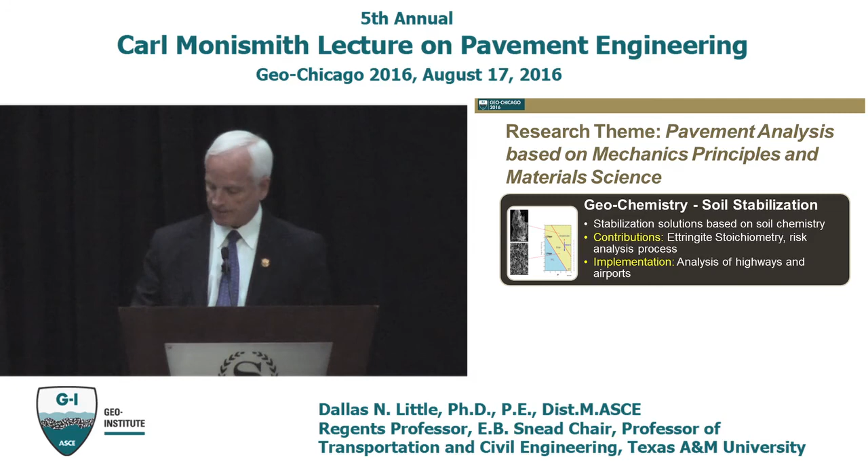We have problems in chemical soil stabilization. Sometimes the problems are simple, sometimes they're great. And when we try to solve those problems, we really have to go back to a basic understanding of the geochemistry and the material science behind it. That's where I get a lot of kicks, that's where I have fun.

Now let's go back to the basic analysis of a flexible pavement system. The tool we're using is called Panda, which is a computational model of the pavement structure. In the constitutive relationships within Panda, it's important that we characterize the asphalt as nonlinear, viscoelastic, and viscoplastic.

Besides doing that, we have a number of state variables that help define the response of the asphalt, and I've listed those state variables here. The first one, the Q term, is simply a definition of how the failure surface changes.

It's a dynamic failure surface. So when we calculate damage, we're calculating damage against a moving failure surface that hardens with load applications, and if there's an extended rest period between or among load applications, there's a bit of relaxation. So this state variable that defines the movement of the failure surface has a hardening function that moves it forward, makes it stronger, and it has a bit of a relaxation function in it as well that we have determined is required over a long time of research.

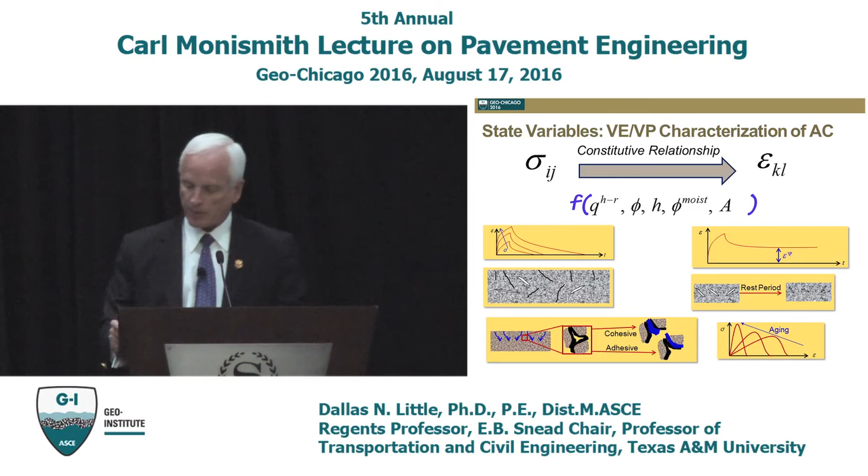So our model, Panda, is a nonlinear model, and it characterizes the asphalt as nonlinear, viscoelastic, viscoplastic. The model that we use for the nonlinear viscoelastic portion is a model that was developed in the late 60s by Dick Schapery at Texas A&M. And the G terms in this particular model define the level of stress sensitivity that makes it nonlinear.

The first G sub naught modifies the initial compliance, the elastic response. The terms before and after the integral, G1 and G2, modify the transient compliance response. And of course, we have a time-temperature shift factor involved in this calculation of the viscoelastic properties.

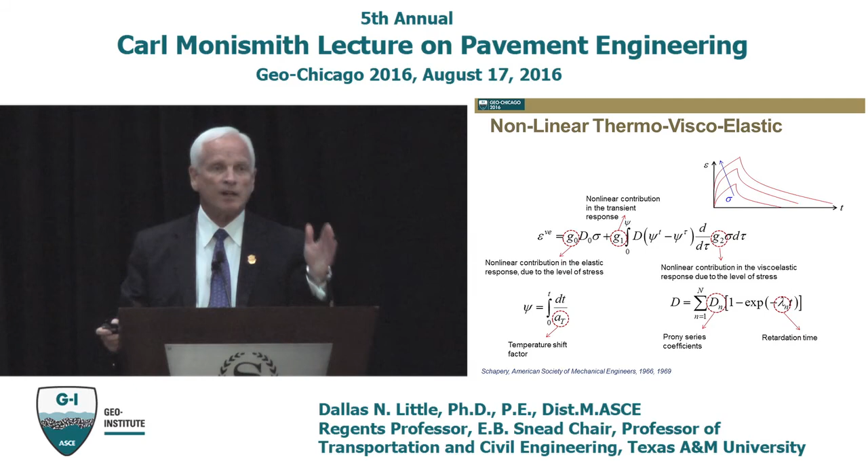And we find it more convenient to model the transient compliance using a Prony series, where d sub n represents the coefficient and lambda sub n represents the retardation times in the Prony series that defines the viscoelastic response, which is modeled by a series of Kelvin systems in the model. So we accommodate viscoelasticity, and to make a long story short, we accommodate nonlinear viscoelasticity as well.

So how does Panda deal with rutting? How does it deal with plastic deformation? Well, I'm taking some pretty complex processes and trying to simplify them, trying to boil them down to some simple discussion here, and sometimes it's very difficult to get too simple in some of these models. But what Panda does is account for the viscoelastic component of strain, as we just discussed, and it also accounts for a non-recoverable, viscoplastic component of strain, and that's what causes rutting to occur.

So the viscoplastic component of strain is accounted for by a Perzyna-type model. In 1971, Perzyna and his colleagues came up with a model that defines the rate of viscoplastic strain, and that function looks like this. It looks pretty complex, pretty hairy, but basically it starts off with an initial identifier of the rate of initial plastic deformation - that's the gamma superscript VP term.

Then, within the brackets here, which are called Macaulay brackets, there is a phi function times F, which is called an overstress function. Essentially what this term does is identify the stress point. If the stress point is behind the yield surface - you can see the dark curve here, that's the yield surface - and if it's within the yield surface, no plastic deformation occurs; it simply does not develop rutting. But if it occurs outside that yield surface, then plastic deformation occurs.

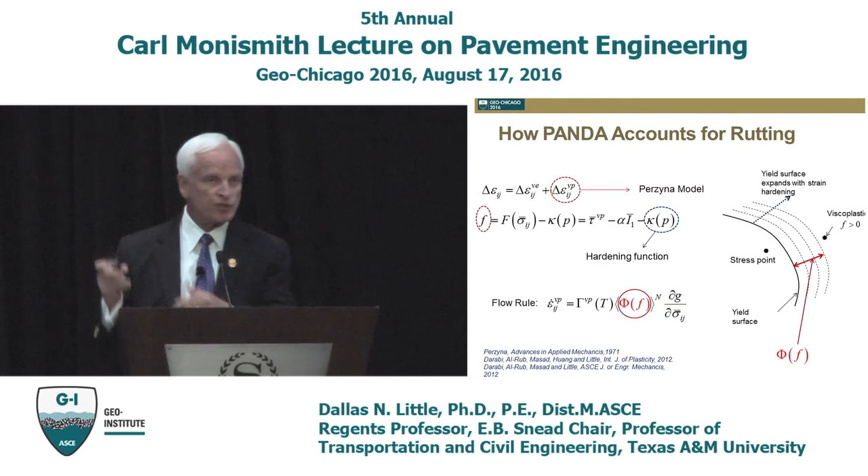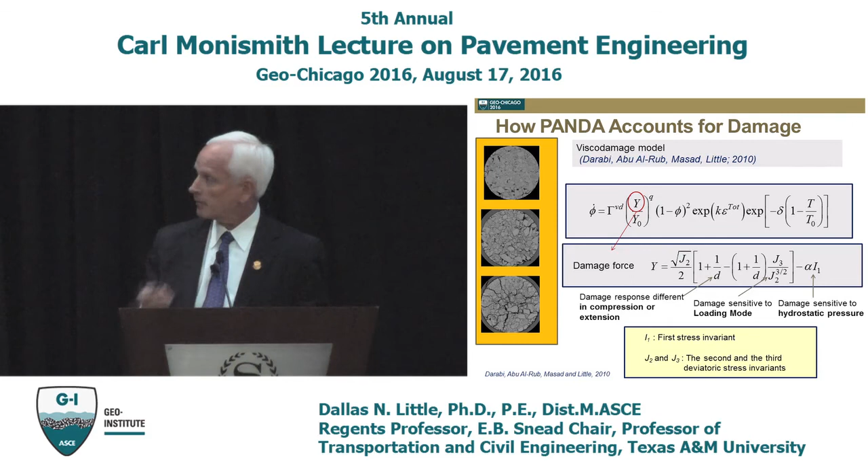Now we've got a way to calculate damage. This damage we're looking at, we're really viewing as a series of microcracks that are compromising the integrity of the area resisting load, using continuum damage mechanics. The Y function, driven by shear stresses and mediated by confining pressures, drives this damage force.

There's something working against this damage force, and that is healing. Several years ago, one of my students, Professor Amit Bhasin, now Associate Professor at the University of Texas at Austin, looked into the work of healing in polymers, and he came up with some work by Professors Wool and O'Connor back in 1981.

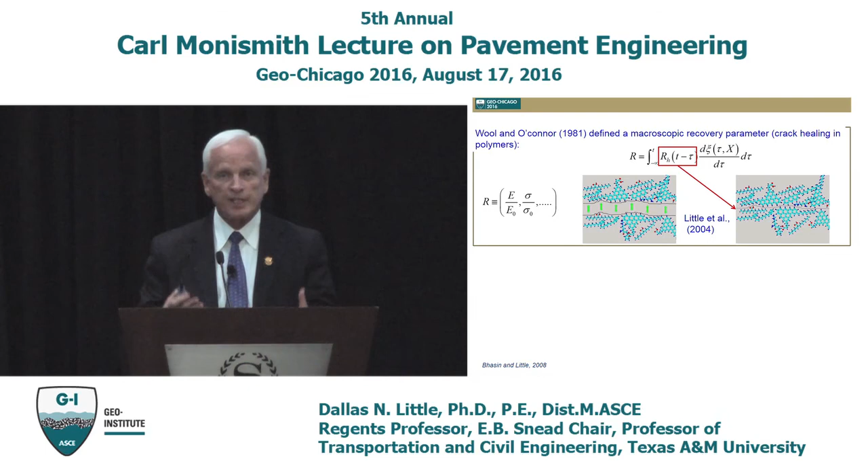So what's going on as the crack closes is that these molecules are reorganizing themselves, redistributing to minimize the free energy, to lower that high free energy. That free energy is high on two open crack faces because you've got so many incomplete bonds. So when they come back together, free energy wants to minimize, and that causes mobilization across the crack face.

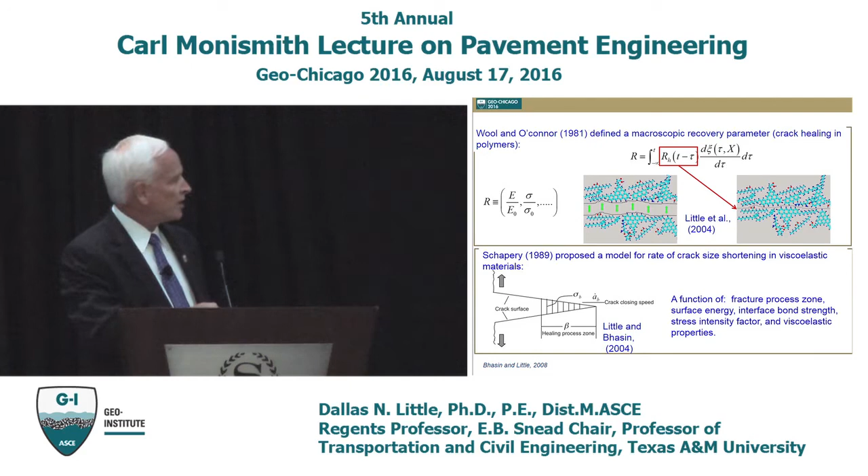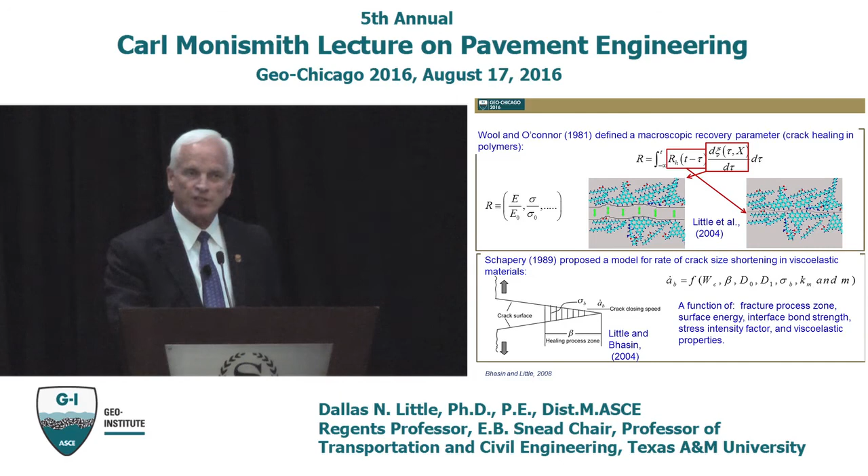So we said, well, that's a great model for healing. And around the same time, actually a little after that, Dick Schapery said that crack healing in a viscoelastic material is a function of the size of the process zone, how big the crack is, the stress that pulls the crack back together, the viscoelastic compliance properties of the crack itself, how mobile that crack is to closing, and surface free energy. So both claim that surface free energy has something to do with that wetting process and that healing process.

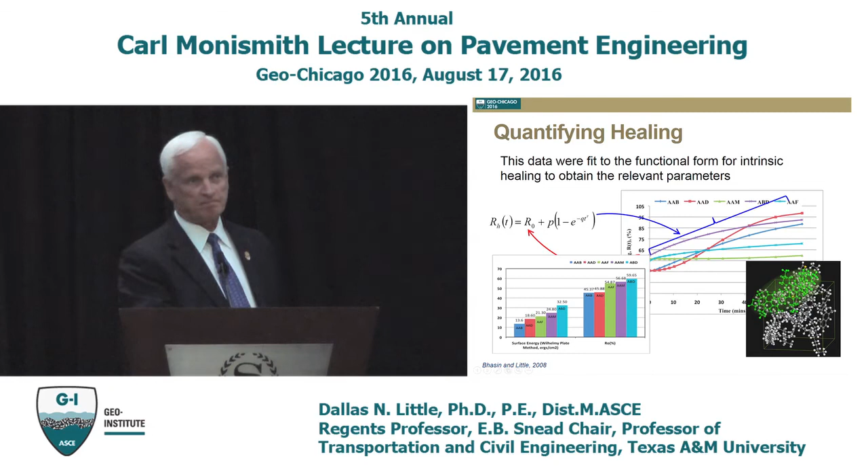And what we found was not surprising: the more mobile the molecular structures, the greater the healing, and the faster the healing. So that gave us a lot of confidence.

Let's go now to some work that was done by another PhD student of mine who's now assistant professor at the University of Kansas, and his name is Masoud Darabi. Masoud has been of great help in helping us develop Panda. His brains are behind much of the complex mechanics.

So what Masoud did in his PhD work was he looked at a controlled strain fatigue test. And of course he said, well, we're going to have a little compression in this controlled strain fatigue test because we're going to push the sample back together. This is a uniaxial sample. So we're going to pull a strain on it, we're going to push it back together, and during this tensile mode from A to B, of course we have a tensile stress.

And when we go from A to B, the crack is becoming longer. Fatigue damage is occurring because of increasing microcrack length.

When this occurs, when we put the compressive mode into play from B to C, we develop a compressive stress in that controlled strain sample as we push it back together. And one would think that during that compressive mode, maybe some of that crack that's pushed back together would re-wet, reorganize, and you'd develop at least a partial recovery in strength.

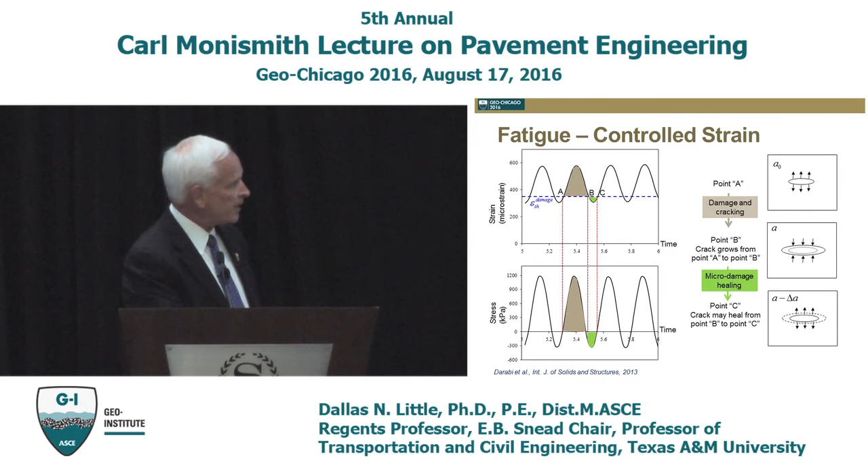So Masoud did some very careful work in a number of fatigue experiments, and what he found was that if we used our viscoelastic, viscoplastic damage model that we just discussed, towards the middle point and the end of the experiments, the experimental data would look like the blue hysteresis loop, and the model would look like the red hysteresis loop, which is much flatter.

You can see the angle if you draw a line from that point to that point, and a line from that point to that point.

The slope goes down, indicating that there's a reduction in stiffness and that there's more damage occurring in the model than would be actually seen in the experiment.

When we put in a healing evolution function that follows the trend we just discussed, it allows us to pretty much track the experimental data, the green curve and the blue curve.

So what I've done is looked at the blue curve, which is the experimental data. The green curve is the viscoelastic, viscoplastic damage model with the healing evolution function placed into it, and it tracks the blue curve much better than the red curve, which is the viscoelastic, viscoplastic damage model without healing.

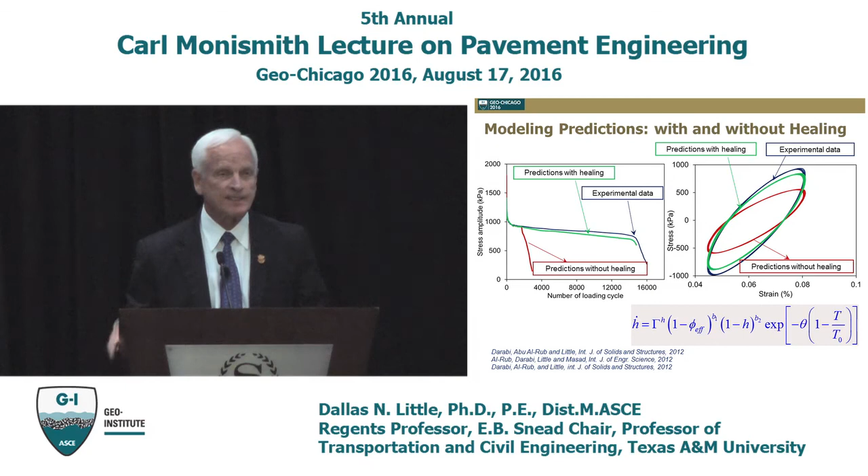Now we've talked about some of the evolution functions for those state variables and how we view them in Panda. We've already said that Panda is a viscoelastic, viscoplastic model of the asphalt, and we can couple in healing. We don't have to use it, but we can couple it into the analysis.

I'm going to skip now from the general pavement mixture homogeneous layer level to the micro level, where we're actually looking at the structure of the asphalt. We would get that structure from some type of imaging technique such as tomography, to understand what the shape of the aggregate particles looks like. The blue in between the aggregate particles would be the mastic, the fine aggregate matrix.

In this particular micromechanical analysis, we're going to look at a component of the mixture and blow it up. The aggregate is considered elastic. The blue material would be the fine aggregate, the asphalt, mineral filler and so forth. You've also got a light blue interface, which is the adhesive interface, so we can characterize the nature of that interface as well.

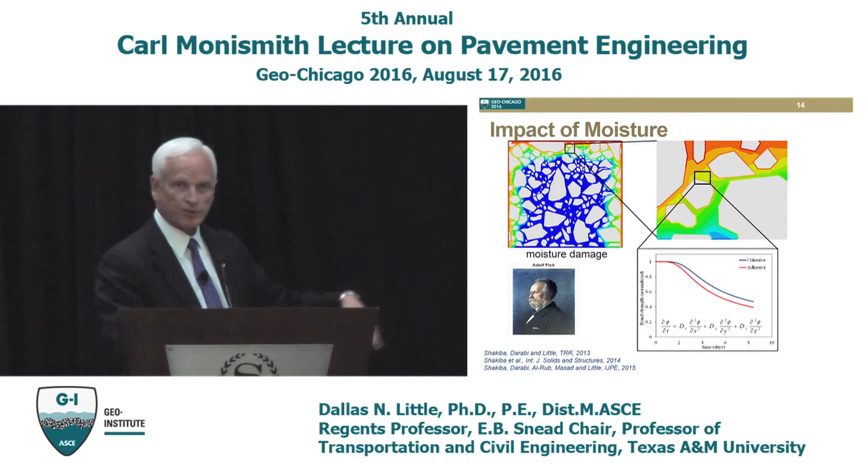In this particular simulation, moisture diffuses, and as it diffuses we're tracking the bond strength. The blue is the cohesive bond strength, the strength of the mastic being compromised because it's moisture laden. The red is the strength at the interface, the adhesive strength. You can see they diminish as moisture increases into the sample, as the moisture state becomes higher and higher.

Now let's go a step further. Let's say we're going to model something very simple. We've got an aggregate particle, the blue mastic, another aggregate particle, the red interface where adhesion occurs, and an air void here. That air void is now filled with water, it's saturated, and we're allowing diffusion to occur. If we apply a load to this material, let me back up.

If we apply a load to this material, then the mechanical process coupled with the moisture diffusion allows us to envision the rate of damage. You can see that when it's a saturated media, that rate of damage is going to be a whole lot faster because the hot colors represent a higher level of damage, the cooler, lighter colors, a lower level. When it's unsaturated, of course, the damage process is lower.

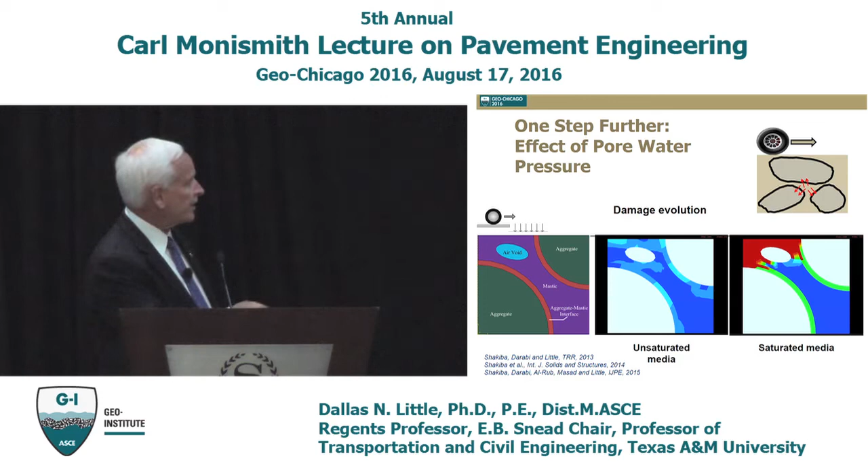Here's another view of a similar situation. What we're doing here is looking at the damage process. We're blowing up this little section in this micromechanical analysis, and the hotter colors represent the damage areas, so you can see that damage is occurring at that interface in most situations, which would cause stripping.

Why did I show this? Well, I thought this was a good way to show you how Panda has the capability of taking mechanical damage and coupling it with the effect of moisture. As moisture penetrates and diffuses into the system according to a recognized law like Fick's law, where we define the diffusivity, and we couple in the mechanical load, then we can visualize the damage process. We can do this at the mixture scale, the micro scale, or at the global scale or the pavement scale.

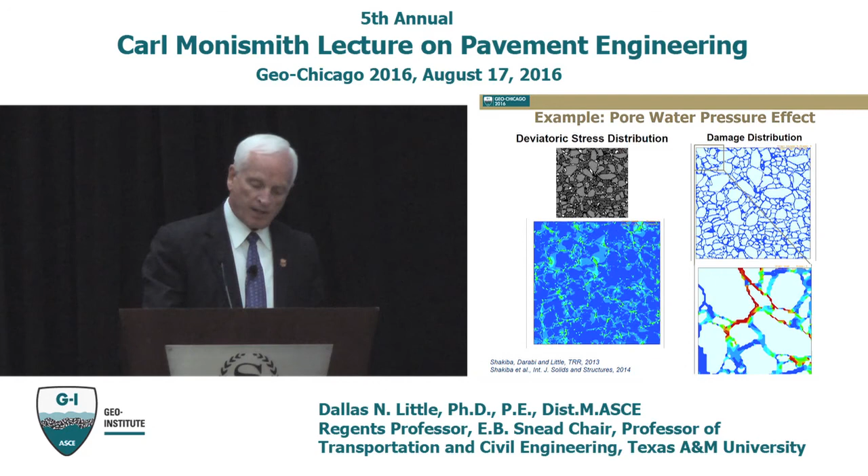What's the end result of something like that? Well, I'm getting ahead of myself. Hold on a second, I'll tell you. Let me go back one more step.

We talked about some of the basic fundamentals behind adhesion. So we did a lot of work on looking at adhesion and how aggregates and asphalt bond together. A little animation here: let's suppose the red is an asphalt, A, and the gray is a stone, S. The work of adhesion between the stone and the asphalt, as I pull them apart, defines the bond strength. So if we know the surface energy, which we can measure, of the stone, and the surface energy, which we can measure, of the asphalt, we can calculate the adhesive bond strength.

Here I've given you a little simulation. If you have a silica aggregate, then normally the high surface energy is because of these unbonded hydroxides, and the asphalt is going to want to bond with that because of its polar components bonding with the surface of the silica. That's what causes surface energy of both, the free bonds, and so that can be used to calculate the work of adhesion between the stone and the asphalt.

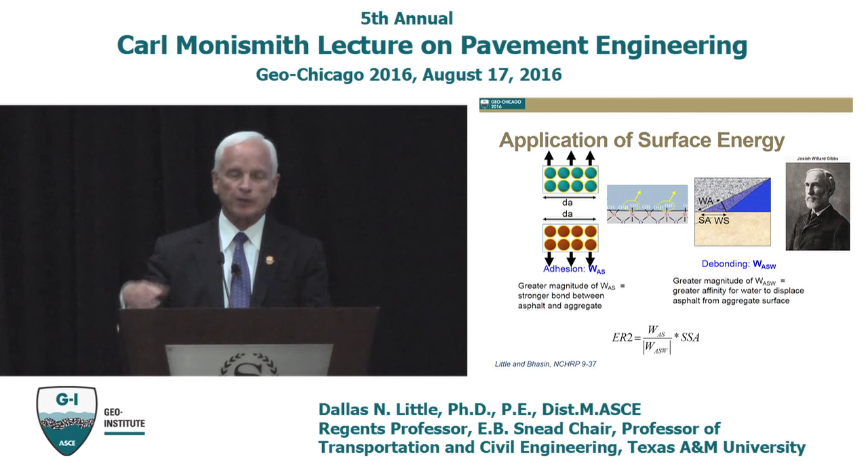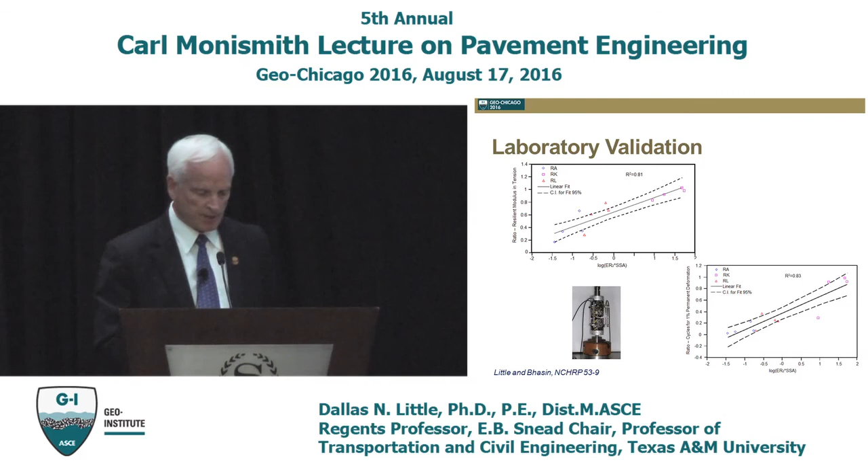Down here is the same kind of data, except we're looking at permanent deformation—1% permanent deformation—versus number of cycles to reach it. A high energy ratio gives a better response, a low energy ratio gives a poor response. So this is pretty good, solid validation data.

Let's now look at some practical application of all that. In these rectangular plots, I have the asphalt layer, and these are contours of damage. On top, you've got mechanical loading only after 20,000 cycles. Notice where the localization of damage is—it localizes down here in red, at the bottom of the asphalt layer, near the edge of the tire load. That's not a big surprise; intuitively we'd expect that from layered elastic analysis.

But now let's couple in the effect of moisture softening from diffusion of moisture. Now we have two localizations of damage, one near the bottom, one near the top. So this might be a bottom-up crack, and that could be a top-down crack. This coupling of environmental effects of moisture damage with mechanical effects can be very valid—it's something we really need to begin to focus on.

I'll interject here a question someone will always ask in a presentation like this: so what? That's so computationally intensive I'd never be able to do it. But that doesn't mean we as researchers shouldn't strive to go the extra mile to see what's in the future and keep moving towards a better system. Computational techniques are moving at a very rapid rate, and soon we'll have the power to do this, even in 3D mode—I'm confident.

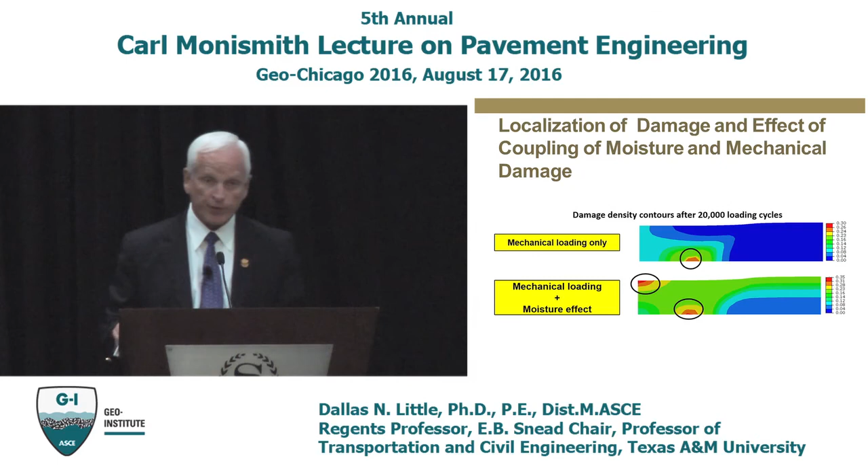Now this is another localization model. In this case we've got four asphalt segments with a load under the arrows: unaged on the upper left, 6 months on the upper right, 60 months lower left, and 120 months lower right. We look at the evolution of damage.

This is 8,000 load cycles, and you can see another change in the localization of damage. If it's unaged, there's not as much damage, but it still localizes near the bottom. With the effect of aging, as you'd expect, it becomes more brittle, but the critical area is near the surface, and it expands as the aging process occurs.

I'd love to talk to you about the evolution function of the aging state variable, but time doesn't permit that. As a matter of fact, I'm probably already getting close, and I'm not close to finishing, so I need to hurry up.

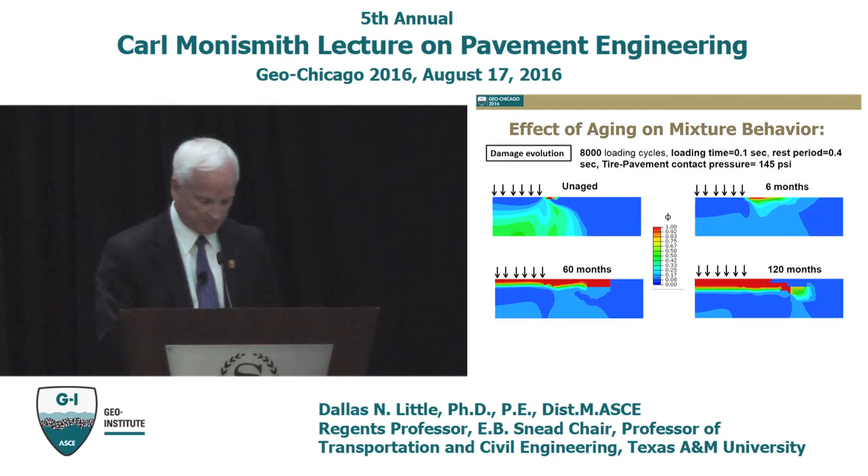In the last year, we've been very fortunate to work with Dr. Navneet Garg at the FAA, at their test facility in Atlantic City, New Jersey, looking at the damage done by the next generation of aircraft. These aircraft have high tire pressures and heavy wheel loads, and they're tracking through that magnificent facility doing accelerated testing. We're using Panda to evaluate the damage that occurs under those pavements.

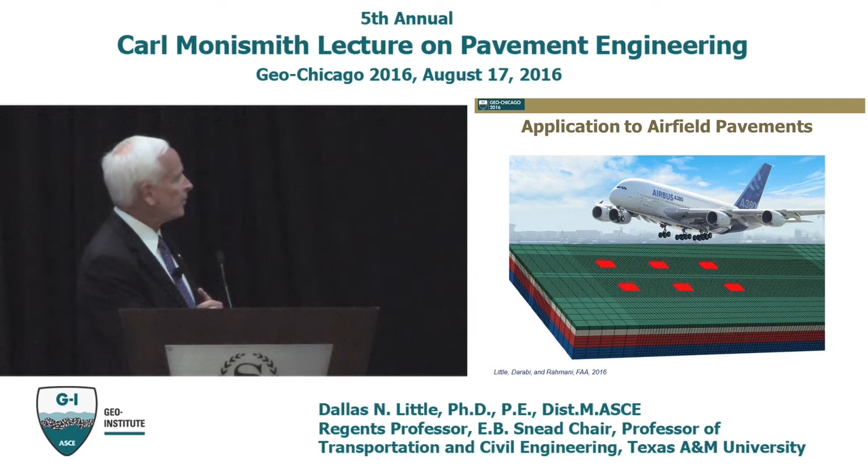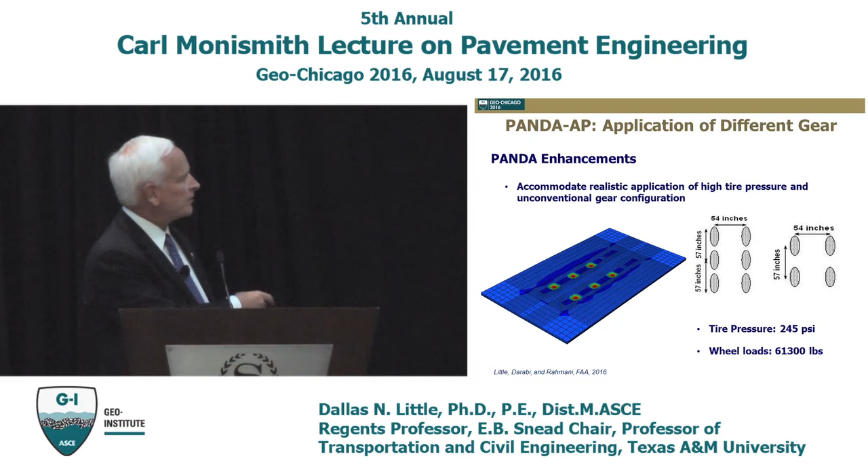I want to talk about one point here. We're looking at multiple wheel loads, so most of it has to be 3D simulation dealing with high tire pressures. One thing that struck me in the initial data: these are vertical stress contours under the load of something like a 777. The asphalt layer is fairly thin in these sections, I think about 5 inches, and then you've got the base and subbase.

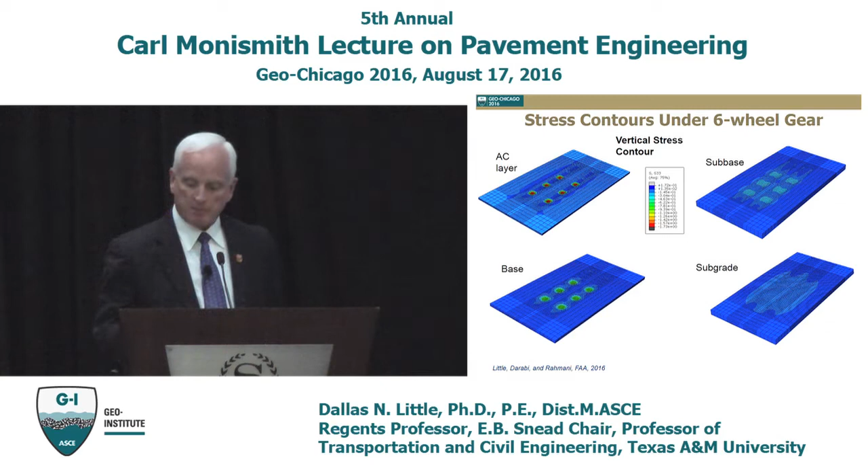You can see the vertical stress contours are high in the asphalt layer and very low in the subgrade, which is like a CBR3 subgrade. But if you look at the viscoplastic strain that occurs in the pavement layers according to Panda, even though those vertical stresses are high, the viscoplastic strain in the asphalt layer is negligible because it resists it, according to that plastic deformation model. Down here in the subbase is where you really have high viscoplastic strain—so that's where the rutting is occurring.

Prior to looking at the FAA sections, we were concentrating only on the asphalt layer. Certainly, with this kind of data, we have to turn our focus to the strain that's occurring, the plastic strain that's occurring in the sublayers.

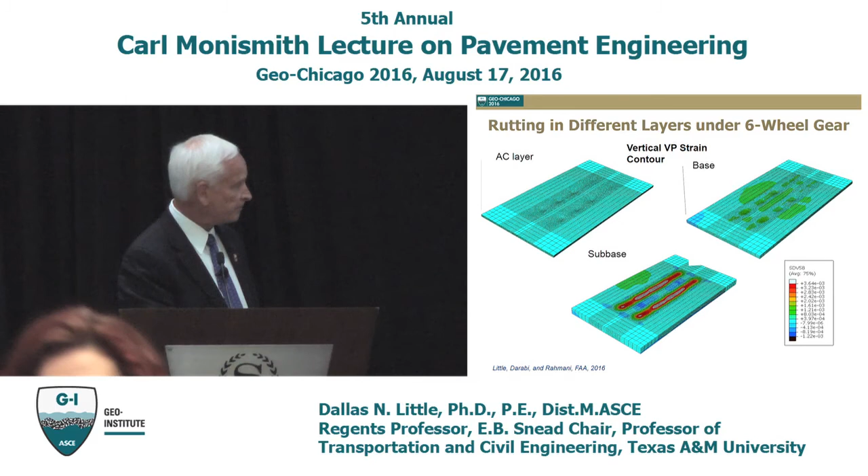Marshall Thompson and Erol Tutumluer would tell you that right off the bat, with all the work they've done on that at the University of Illinois and others. Bob Lytton too, but this is something we had to come up with as a good model for plastic deformation of these sublayers. So this is what we used.

We tried many different models to try to mimic what occurred at the FAA test facility, and what we came up with was a modified Drucker-Prager with a cap. That's nothing new; Drucker introduced that back in 1957. So we're not claiming we came up with this model, we're just applying it, probably a modified version, to see if we can understand the data we're getting from the FAA facility.

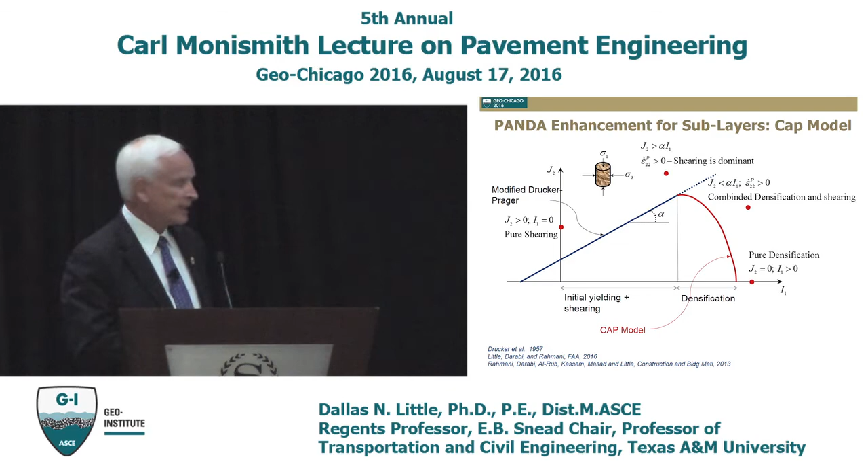And that tells us that even if we're below the shear surface, if we're outside of that red curve, densification can occur. Looking at the data at the test site in New Jersey, we found that much of the time it wasn't the shear stresses that caused that densification, but it was indeed the consolidation, the confinement that occurred in the subgrade that caused it.

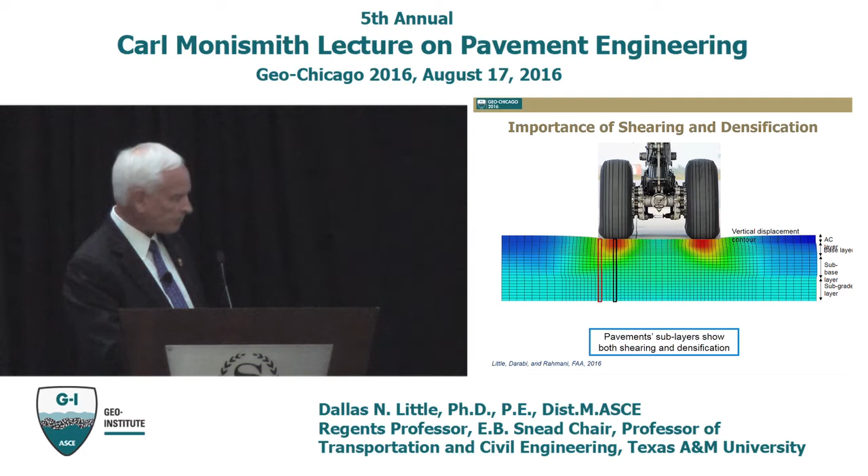densification-induced plastic strain. So this model evaluates plastic strain in the sublayers, the unbound layers, due to both densification as well as shear stresses. It takes both to mimic what's going on out there in the field.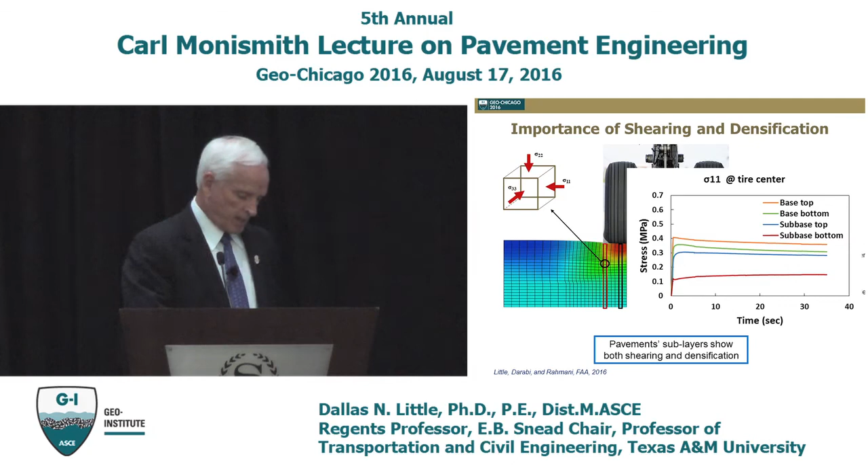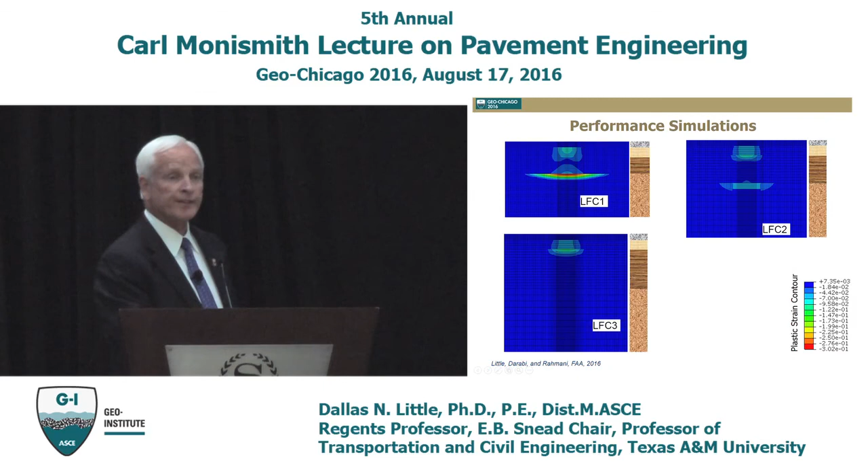We tried to use this approach to actually calculate the rut depths occurring in three sections, LFC 1, LFC 2, and LFC 3. The only difference among the three sections is that in all three the asphalt layer and base layer are the same thickness and material, so there's no difference there. The only difference is the thickness of the subbase, and all the subbase is the same material.

As you would expect, you're going to get more rutting in LFC 1 than in 2 or 3 because of the higher stresses there, and that's exactly what we saw. But the kicker is not just that, but how much they differ and how well you can predict it. Got a little too much animation here, could do without all of it, but it shows pretty much the same thing.

What we see here is that we were able to predict the amount of rutting under a certain level of traffic, which was quite significant due to subgrade deformation, using the Drucker-Prager cap model. Quite different: this is about 2.3 something inches at the top, and 1.5, 1.25. So a good bit of difference as the thickness of the subbase increases.

And this is the way we were able to predict it. We did a really good job in LFC1, as you can see the line mimics the data pretty closely. In LFC2, the data are the open circles, and the blue line is the measured or model response.

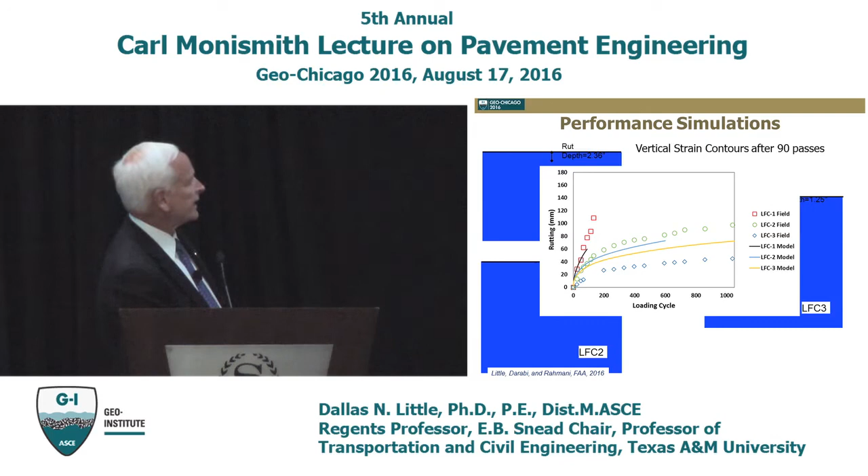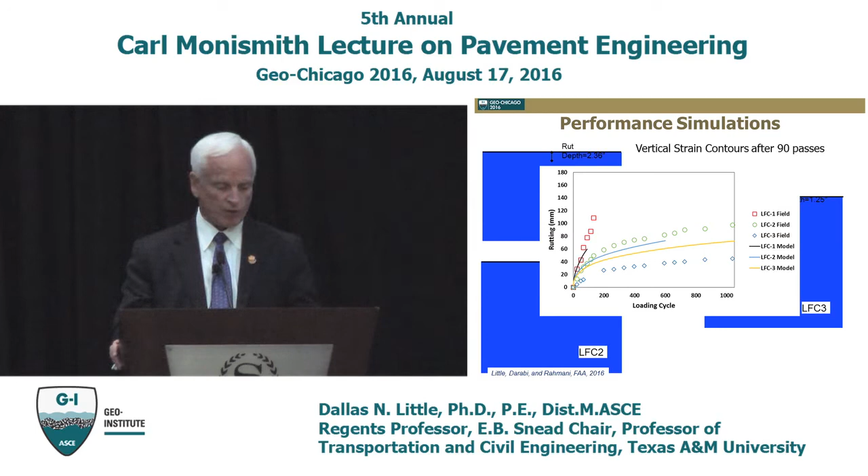In LFC3, we weren't quite as good, but we can improve that with 3-dimensional modeling. This was just a 2-dimensional axisymmetric model. I guess the key here is that we've got a fairly good model to evaluate plastic strain in the subgrade, and we certainly have to pay attention to that. We just can't focus on what's going on in the asphalt.

One other test section that we looked at was with John Rushing. Dr. Rushing is a research engineer at ERDC, the Engineer Research and Development Center, and a former student of mine at Texas A&M under the Army Corps of Engineers PhD program. They ran some experiments under F-15 high-pressure tires and C-17 high-weight, lower pressure tires.

What was interesting to me there was we were able to predict rutting. The asphalt layer was designed to rut. The sublayers, in that case, were considered to be elastic in our analysis. They were very stiff and were not designed to rut. If you look at the cross-section, that's pretty much exactly what happened.

Panda was able to predict the level of rutting within very reasonable levels, 5 millimeters where actual was 7 for the C-17, and 25 millimeters versus 29 for the F-15, the high tire pressure aircraft. But what was also impressive was if you look at the shape of the deflection basin, you can see the consolidation in the middle. You can also see the shearing and the pooching out on the side due to that lateral shear stress movement, which pretty much mimics what you saw in the cross sections in the field.

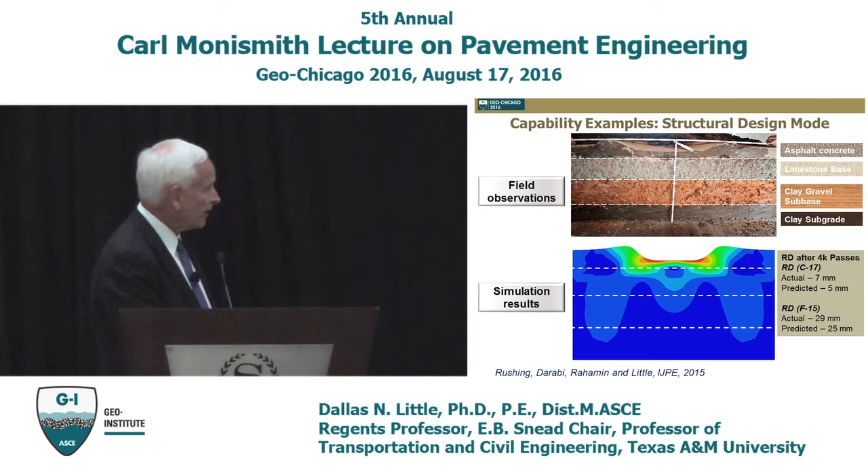So that was rather pleasing. I want to give tribute here to Professor Yong-Rak Kim, full Professor at the University of Nebraska. He's taken this type of work, and I'm just going to spend a minute on it. This is his work, but he did a lot of it through the Asphalt Research Consortium, and he's very kind to share that work with us and allow us to take some credit for at least helping him get it done. He's coupling, or communicating, between the micro-mechanical scale, the mixture scale, and what happens in the field. He calls the mixture scale the local scale, and he calls the pavement scale the global scale.

So what he does is he has an idea of what the representative volume element, if you want to call it that, of the mixture looks like, the aggregate distribution, the aggregate shape, and so forth, the properties of the aggregate, the properties of the mastic, and the properties of the interface. So he's able to look at that, and what he does is he relates the input between the global and the local. He calculates a homogenized global tensor from the local scale, so he sort of takes the local scale and homogenizes it by taking an average of the data.

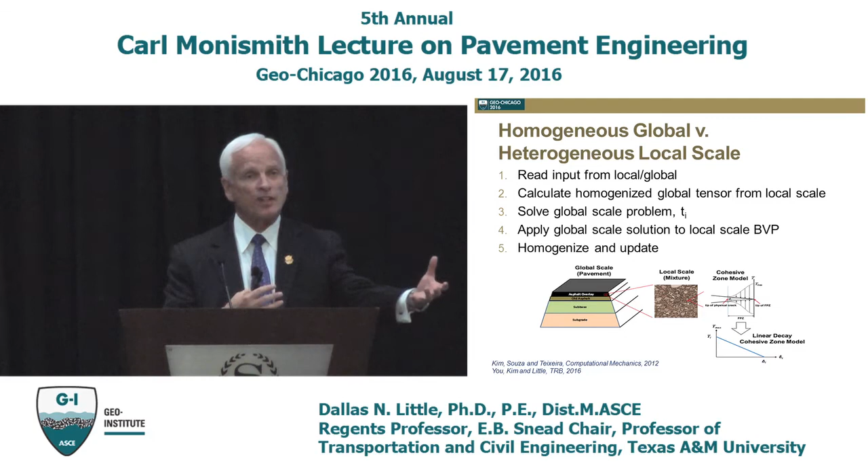Because you're going to transmit that information, that stiffness information, for example, to the global scale. At the global scale, you're going to have different stress states that are going to be communicated back to the mixture scale.

Here's an example of a paper that he wrote, and he was allowed to put my name on it because he felt sorry for me as an old professor. At any rate, he did an analysis of I-80 there in Nebraska, and won't go through too much detail, but he identified 3 or 4 representative volume elements that are in different locations under the wheel load. Being under different locations under the wheel load, they're subjected to different stress states. So we're going to communicate that back to the mixture scale, and the mixture scale is going to consider how much damage is done and homogenize that and communicate that back to the global scale.

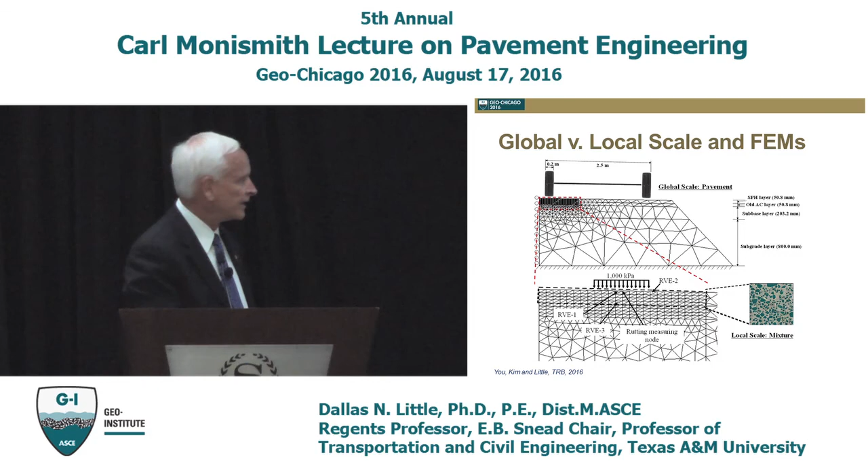So here's a little bit of an example, a little movie. I hope you can see it. We've got those elements that are located in different positions. One's right under the wheel, one's at the edge of the wheel, one's at the bottom of the AC layer, and one's way out here. And you can see the development of these damage areas that are developing into cracks, larger cracks.

So what happens is that he uses a cohesive zone element. The traction at the tip of the cohesive zone element identifies when a cohesive element is actually initiated, which can track the progression of cracks. Pretty ingenious method, and if you have any specific questions, I would encourage that you talk to him. So at this point in time, if I have time, if you have permission to have a little bit longer,

I'm going to talk a little bit about some geochemistry for about 15 minutes. If that's allowable, then I'll let Errol tell me. But at this point in time, I want to quickly review what we've talked about so far: a template called Panda that characterizes the asphalt as viscoelastic, viscoplastic, nonlinear. Those are very important parameters.

Panda is set in a template that is based on continuum damage mechanics. Continuum damage mechanics has some limitations, but its true value is that it allows us to couple other mechanisms with it. For example, moisture diffusion, weakening of the mastic, weakening of the asphalt aggregate interface because of moisture. It allows us to couple in the effects of aging, which harden the asphalt, making it more susceptible to damage.

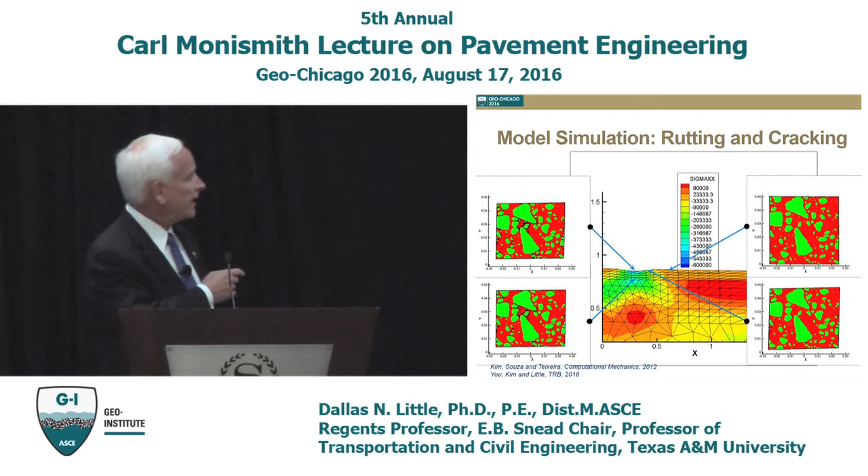Well, I had one other component there. In this paper that Professor Kim prepared, he used this approach, the coupling between the micromechanical mixture scale and the global scale, and he did a simple parametric study. He said, okay, let's say that the mastic, we're going to use case 1, which is the standard reference mastic.

Case 3 is going to be the standard reference mastic. Case 2, I'm going to reduce the mastic properties by 20%, lower them by 20%. Down here under tire loading, I'm going to have a standard tire load for cases 1 and 2. In case 3, I'm going to up it 30%.

And then he evaluated, using this approach, relative rutting and relative cohesive element damage. And you can see that looking at relative rutting, case 2 is about equal with case 3, and about 40% more rutting in those two cases than the standard. Over here under damage, which is due to crack development in the cohesive zones, or the cohesive elements, you can see that cases 1 and 2 are about the same, but when you get to case 3, it's 5 times the amount of damage.

What strikes me with this, if you compare that with equivalent axle load factors in the AASHTO 1993 design guide, this is a lot different. Because there you're looking at general serviceability change. Right? You're looking at serviceability change, because that's what the 93 design guide is based on, is delta PSI, change in serviceability, which is dominated by what?

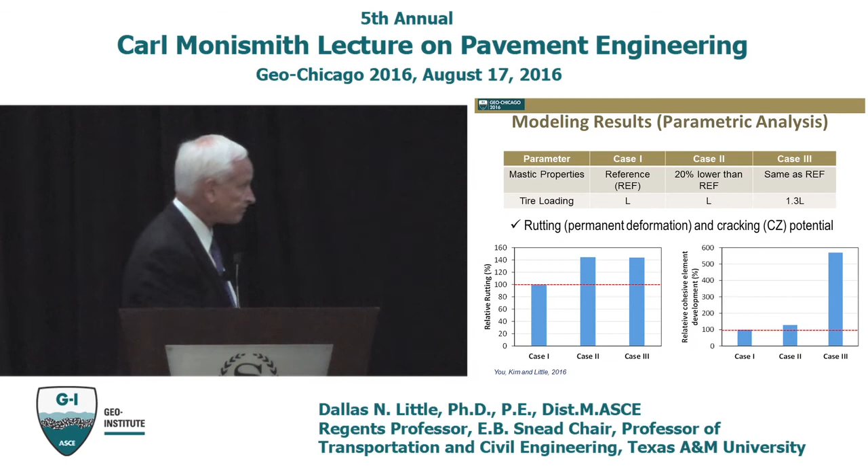Okay, so let's shift gears now and talk a little bit about something that I've always found very interesting. I love stabilization, chemical stabilization of soils. Done a lot of work with lime and cement over the years. And I know you've had a lecture in a previous section.

I wish I was able to hear it. I was not, but back in the mid-80s, after Jim Mitchell gave the Terzaghi lecture on interesting phenomena in soils, one of the things he talked about was the heaving soils at Stewart Avenue in Las Vegas. And that had to do with lime and sulfate-rich soils.

A year or so later, I was involved in Joe Poole Lake up in Arlington, Texas. So we can do all the great design and analysis of pavements we want to, but if we go in and stabilize a sulfate-bearing soil with a calcium-based stabilizer, we're going to get something like this. Damage that you'd never get from heavy loads or environmental effects due to moisture or aging. That's terrible. So we've got to do something about it. We have to address it.

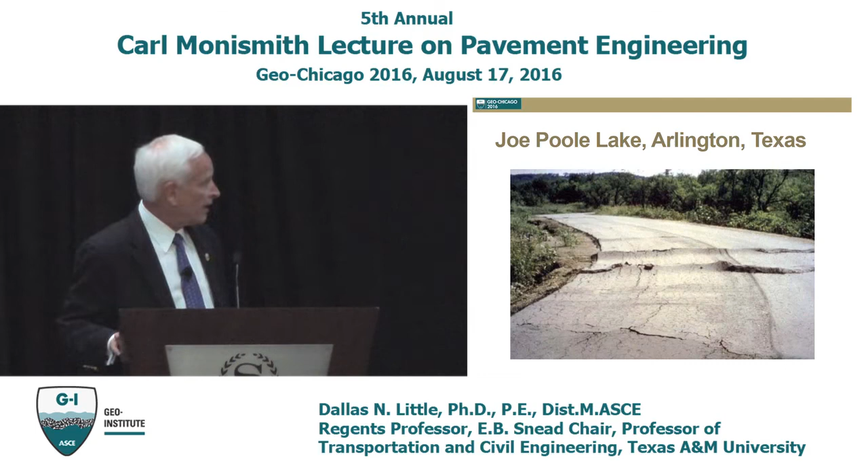Here is a cross-section, and you can see that what has happened is probably more than just vertical movement, you have the accumulation of a lot of lateral strain. That lateral strain has caused more of a thrust fault, where there's a passive earth pressure failure because of the movement over that pavement, the length of the lime stabilized layer.

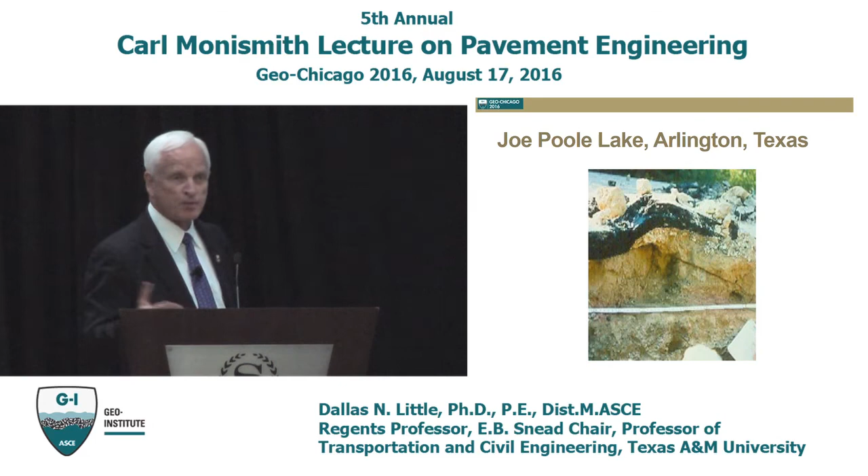So what is causing this problem? Well, I'm sure by now most of you know as geotechnical engineers that there's a material called ettringite, which is a calcium aluminate sulfate hydrate.

Here are the components, the reagents that go into ettringite on the left-hand side. If you look at the molar volumes of those components, to form 1 mole of ettringite it takes 1 mole of C3A. C is shorthand for calcium oxide, A is shorthand for aluminate. So C3A, 1 mole, it takes 3 moles of gypsum - C once again for lime, S bar for sulfate, and H for water - and it takes 26 moles of water, a whole lot of water.

If you look at a picture of ettringite, it looks something like this, a kind of tubular structure with all of those compounds in there. And if you look at it under a scanning electron microscope, it looks like this, sort of a stalky material that's very anisotropic - Errol and I worked for years to get people to say anisotropic, but now they're saying it. So it works and it kind of expands dimensionally differently.

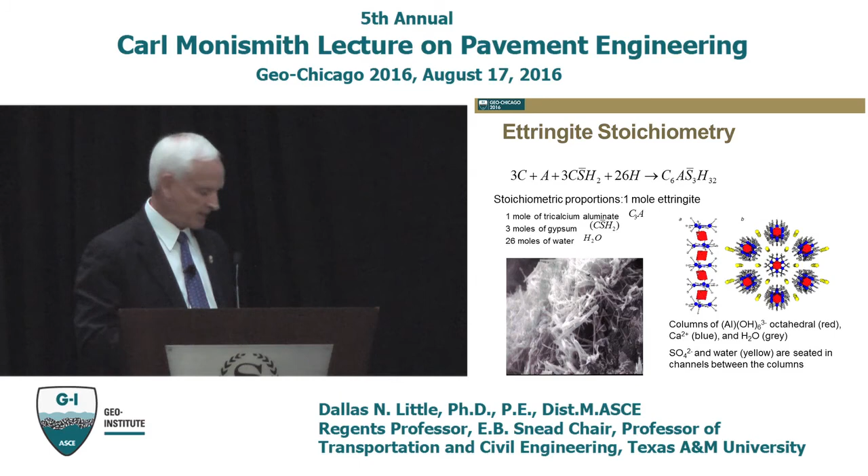So the first step we did was go back to the Gibbs free energy principle, and we looked to our geochemist. Our geochemist said you can do something called a phase diagram, which allows you to evaluate a particular mineral - if you can identify what's in it, it allows you to determine if ettringite is thermodynamically stable in that environment. That's exactly what you see in these two diagrams.

Probably hard to see at the back of the room, but this polygon right here is ettringite, and this polygon over here to the right is ettringite. So when you add lime or cement to a soil, you're going to add it to get the pH up above 12 so it will solubilize the minerals and react with them, the silica and the alumina. So pH 12 is what I'm identifying here by that star. The locus of that star is a pH a little above 12 and also a sulfate content of 3,000 parts per million, which we've identified as an upper threshold.

So at 3,000 parts per million, if I'm in this soil mineral, I am outside of the ettringite polygon, which means some other mineral has a lower free energy than ettringite, and that other mineral will ultimately form. If my star is within the ettringite polygon, that tells me ettringite has the lowest free energy. So that's one way to evaluate whether you'll have the potential for ettringite formation - I don't have time to go into more detail, but it's a stability diagram, a way to evaluate Gibbs free energy.

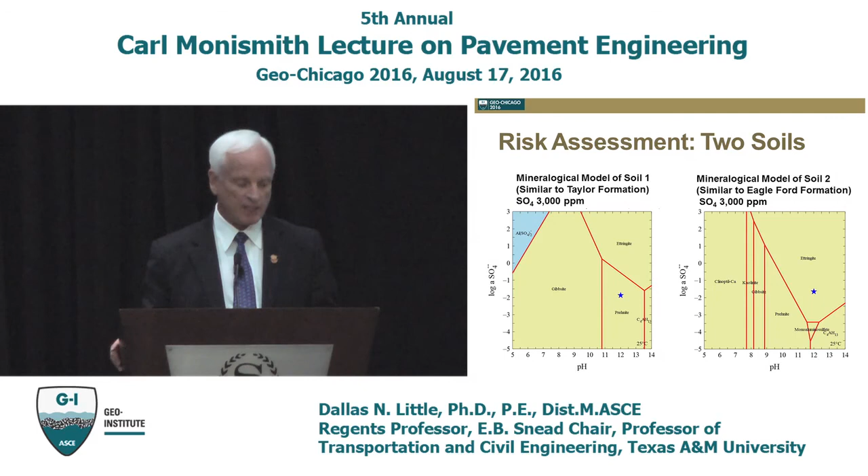Here's something we did in the lab that's quite interesting. We were just trying to test this ability, the power of the thermodynamic stability diagram. In this particular case, we said okay, monosulfoaluminate is a calcium sulfate aluminate compound that's high in alumina. And the ettringite is the trisulfate form, where the sulfate ratio is high compared to the alumina ratio.

So we said, what if you were to start with monosulfoaluminate and, using some type of process I can't go into right now, you took out the alumina - would it show up in the stability diagram? And of course it does, and we also saw it in the experiment. We started out with the monosulfoaluminate, which is up here, and then down here is the ettringite. So once we captured the alumina, we actually saw the transition in terms of the micrograph.

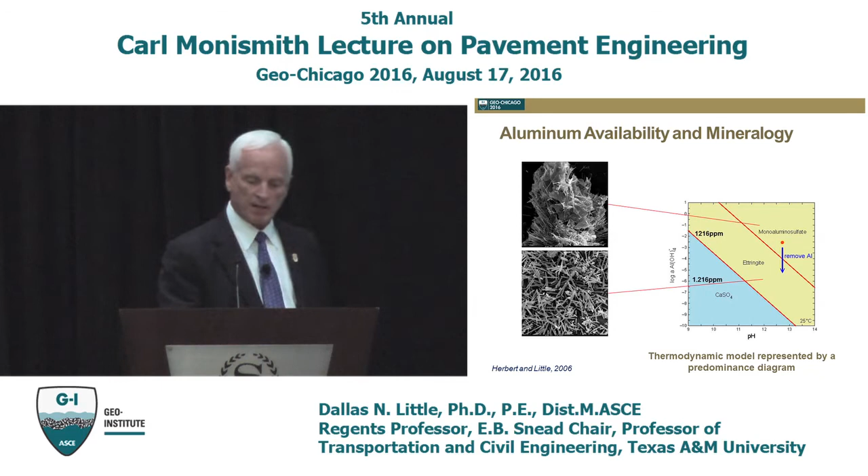From there we said, well, that's really good, really fundamentally important, and we're going to get there. We're going to figure out how to use stability diagrams to help us prevent this, but right now we probably ought to focus on volumetrics. And it's not a really hard thing to do.

We know the chemical formula for ettringite. We know how many moles of each component are in there. We can look in the literature and find the volume of a mole of that component, so we can calculate the volume change. It's simply the molar volume of the products minus the molar volume of the reactants, divided by the molar volume of the reactants.

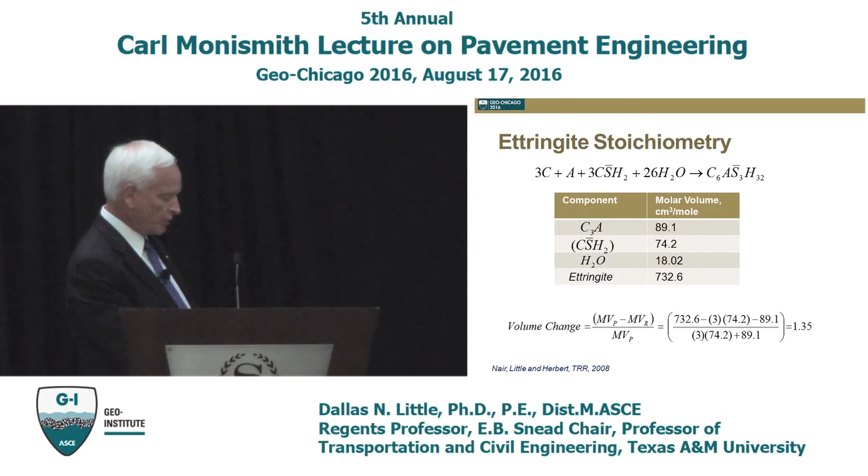When you go through that calculation, you find that if ettringite is fully activated by water coming in from the outside, you get a volume change of 135%. So that's where you come in with the stoichiometrics, and using that you can easily come up with a percent change. If you have 3,000 parts per million, the volume change is going to be a little bit less than 2%. If you have up to 5,000 parts per million, the volume change is going to be around 3%.

Based upon many other aspects of our study, we found that if you develop this 3%, or 3,000 parts per million, and don't allow any more sulfate to come in from the outside, then you're pretty safe, because those sulfates tend to fill the voids but really don't give you too much trouble if you keep mobile sulfates from coming in from the outside. So that's pretty safe. If you go up to between 3,000 and 5,000 parts per million, you become a little bit more risky, but generally your system can accommodate that level of ettringite. Go above that, and you really have to do some special things to guard against it.

So we use basic material science, geochemistry, for the phase diagram, coupled with stoichiometrics to figure out those initial values. Back when we were dealing with the Denver airport in the mid to late 80s is when we were trying to come up with this stuff. And it's still pretty valid. Some of the things we assumed in those days aren't exactly right, but we've fine-tuned those.

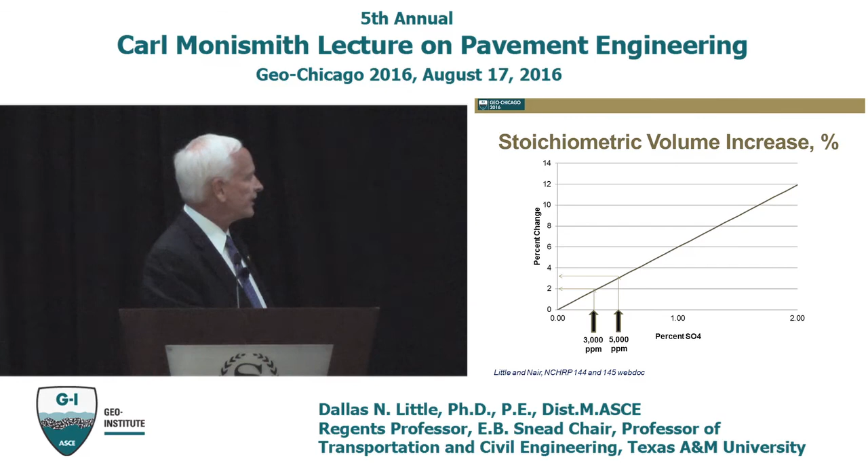Our guidelines, which are in the report shown here that I wrote with Sam Nair, NCHRP 144 and 145, say that less than 3,000 parts per million, your chances of having problems are low. Between 3,000 and 5,000, it's at least moderate. If you go up above that, you need to be very careful.

So what we want to do, basically, if you have sulfate-bearing soils in this range, is add as much water as possible to activate the solution process of sulfate. You'll never add enough water to fully solubilize it because the solubility coefficient is too low, but you want to add enough to begin the process.

So you start to nucleate crystals of ettringite, which form very rapidly if all constituents are available. You start to nucleate these points. With any type of crystal, you have to nucleate before you can grow. So you nucleate the crystals, and then the crystal growth occurs.

So how do you maximize the rate of crystal growth? Well, one way is to make sure you continue to keep it wet, to keep it mobile, to keep it fluid. You mix it as much as you can to get a good intimate mixing, and you extend the mellowing period. Why extend the mellowing period? To give it time for as much of this crystal growth to occur before you compact it as possible, and also to make sure you've used up as many of the constituents as possible.

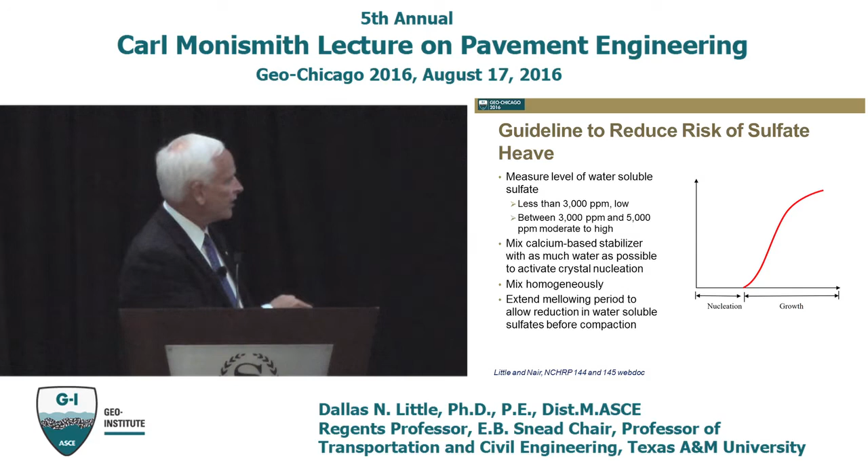One final point that is quite interesting. This is water-soluble sulfate, measured over hours. If I start out with a control and it's dry, the soluble sulfates don't change. But if I get it a little above the plastic limit, and I'm adding lime to it, the water-soluble sulfates drop from a little over 1% down to about a little over 0.5%. That's pretty good. But I can activate that process even more by adding an alumina source.

See, ettringite is calcium aluminate sulfate hydrate. The alumina comes from the soil, and it's not going to be released until we solubilize alumina at that high pH, and that's a slow process. So how do you get this? How do you trick it? The way you trick it is you add a source of soluble alumina. You can get some sources of soluble alumina that are readily available and quite reactive.

And so what you see here is by adding about 12 grams of that alumina—I can't remember what the size of the sample was offhand—but it really did activate the process.

Now what's going on here to cause the water-soluble sulfate to drop? If I get down to 3,000 parts per million, I'm pretty safe. If I compact it at this point, I'm pretty safe volumetrically. So what causes it to drop to that level? Well, it's the fact that the water-soluble sulfates are reacting to form ettringite. They're locked into the ettringite molecule, and they're no longer soluble to form more ettringite.

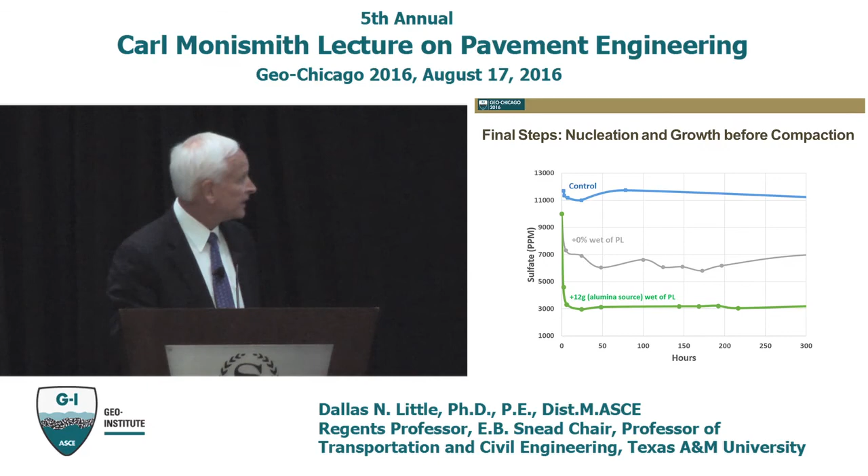One of the other compounds we've been looking at is a terpolymer to stabilize soils. Terpolymer is a polyacrylamide base with an additive that has a cationic, an anionic, and a non-ionic component to it, thinking that those components will be able to interface with some part of the clay molecule, and hopefully the molecule is small enough to meander into this interface between the clays.

And we were able to see, using UV-vis and X-ray diffraction, that the polymer was able to mobilize into those interstitial layers. What's really neat about the polymer is that it can give you the same compressive strength as Portland cement, shockingly, but it gives you a much less brittle material.

If you do a fracture energy calculation, the fracture energy is about 3 times that of the cement stabilized material, meaning that its fatigue life is greatly enhanced.

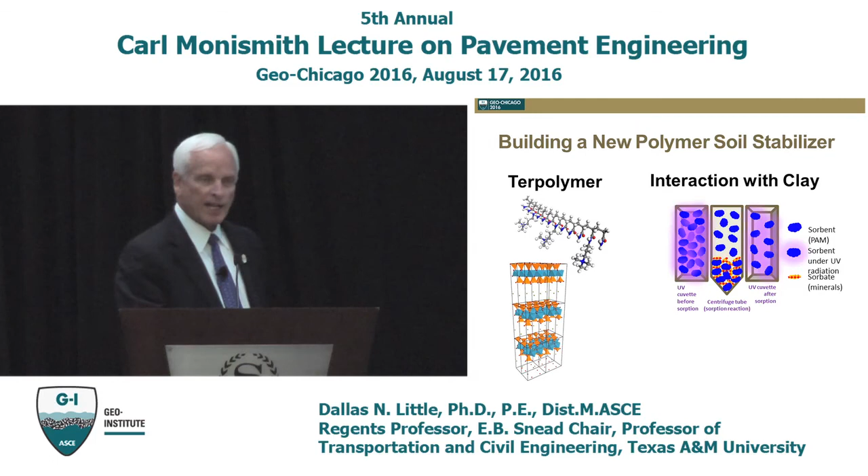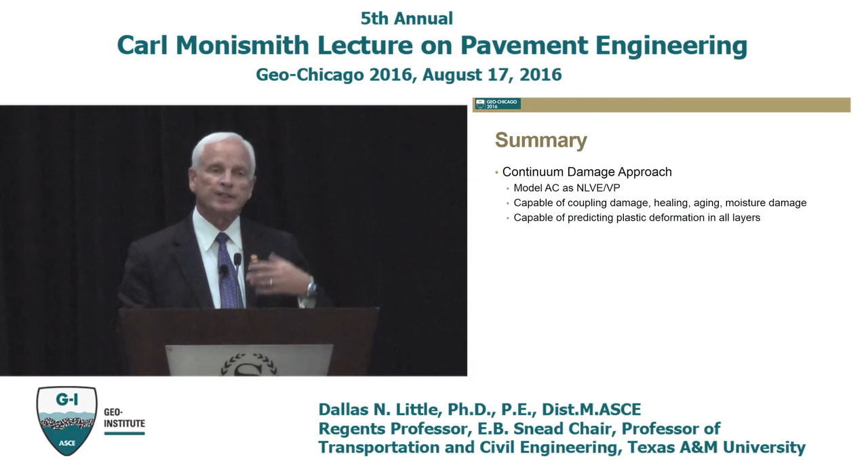Okay, for the sake of time, I'm going to kick to the summary. We have talked about a continuum damage model that has weaknesses, but it has the great strength of being able to couple different processes, like mechanical damage with moisture intrusion, moisture weakening, the effects of aging, and so forth. It is a nonlinear viscoelastic, viscoplastic model.

Capable of coupling, as I said, capable of evaluating fatigue and healing, and capable of predicting plastic deformation, both in the asphalt layer and now in the granular layers.

Multi-scaling—I gave you an example of multi-scaling. Using a model like Panda, for example, can accommodate both the local scale and the global scale. I refer you to the work of Professor Kim at University of Nebraska for more on that approach.

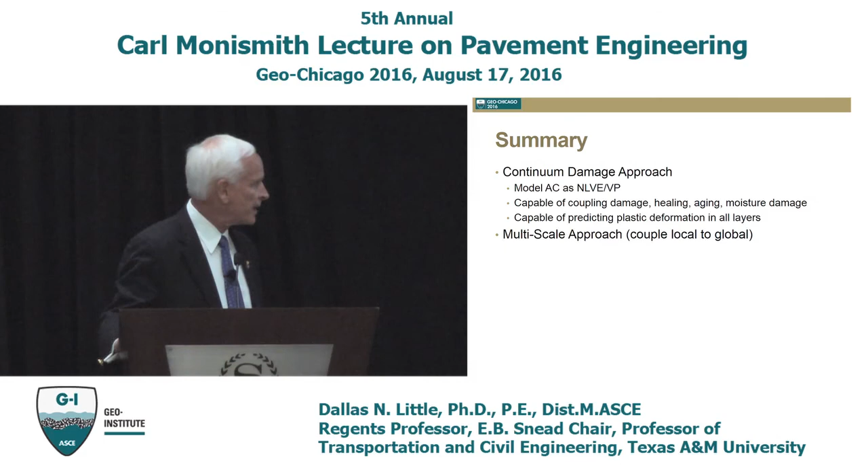We got off of that topic and talked a little bit about chemical soil stabilization. One of the issues there that we talked about as an example was the fact that you're going to have certain problems that you run into, certain deleterious reactions. In these reactions, what we need to do is cross-cut, apply the fundamental principles of geochemistry and material science so that we can understand what's going on and make amends for it, or make reparation for it.

And then we talked a little bit about the idea that we're not stuck with what we have today. We need to use material science and these analytical techniques that our friends in soil science and geochemistry and basic chemistry use to come up with ways to understand the mechanisms.

In this polymer study, we're working very closely with the molecular dynamics chemist, the geochemist, and the soil scientist, helping us understand these mechanisms. And that's the way we were able to understand how the terpolymer works its way into the matrix, the fact that it actually does, and why we're getting a material that has a substantially higher fatigue life and competes at the same compressive strength.

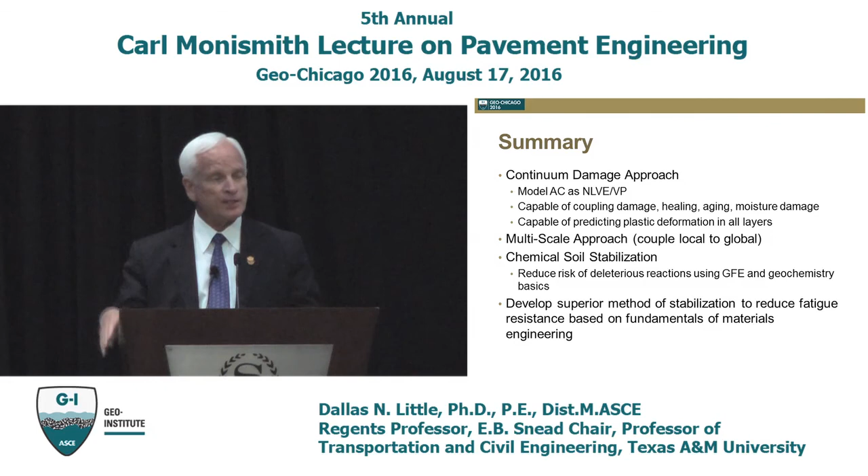We've got to work on making sure that moisture sensitivity is not a lingering problem out there, but we're getting there. So hopefully I've at least left you with the idea that fundamentals are important, theory is important. And as my good friend Bob Lytton said, when questioned whether or not fundamental chemistry and physics were in the real world, he said, they are the real world. So thank you for your attention.